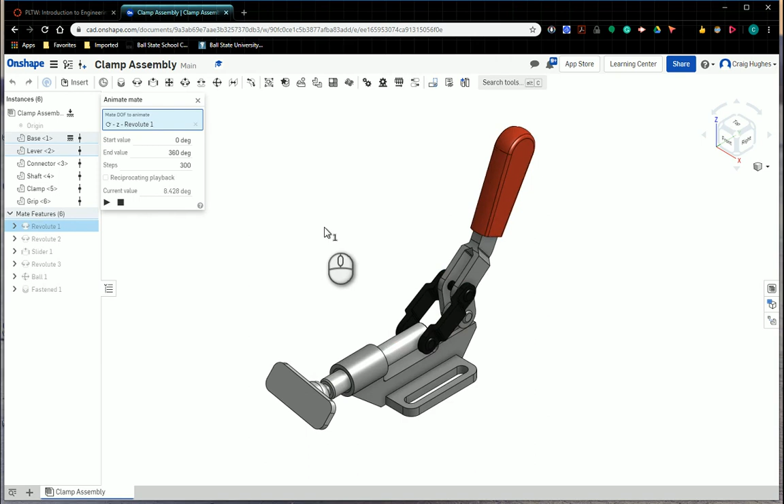If I right click on this and say go to animate, on the very first revolute, and press play, I'm going to get this kind of thing that happens. It's definitely following the motion defined by the mates, but it's not really the correct operation of this particular item.

Let me bring that back. So as we're looking at this, it's not giving us realistic motion. That handle should not be able to go through the body of the base. In order to fix that, Revolute 1 is the one causing that to happen. All the other ones are fine.

I'm going to right click on Revolute 1 and say edit. If I click the play button, that's exactly the motion that's happening. When we go to animate, it just moves that, and all the other parts move with it. So here's what we're going to have to do: we really only want it to move between the position it's in, come down, and then back up.

I'm going to check limits. Right now there's a Z limit. You may have to play around with flip primary axis or reorient secondary axis. The secondary axis and the primary axis actually flip the lever around, so we probably don't want to play with that too much, since it'll mess things up.

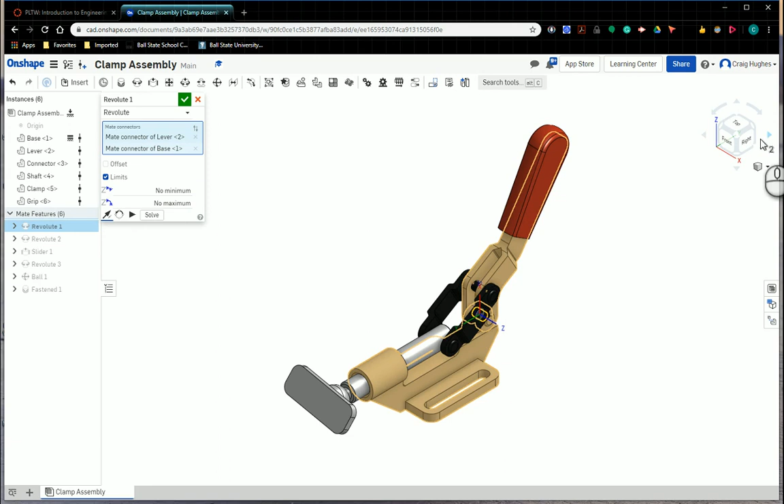I'm going to mess with this a little bit. One way to do that, I'll click over on the right side view, and you'll see there's an X and a Y. When I click that secondary axis, it's going to flip which direction it's in. Right now this isn't exactly the position I want, so I'll click until I get it.

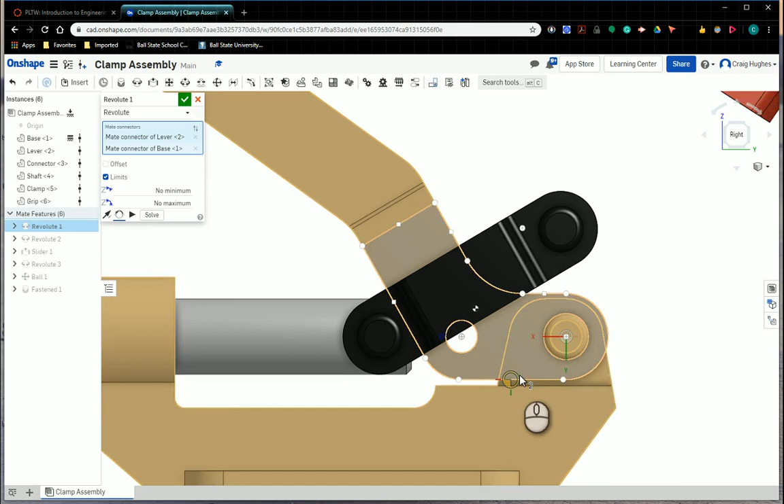This is really what I want to see: starting from this point, the bottom of the lever is going to be parallel with the top of this line, so we're in this position. That's when the clamp is closed, and when you pull it back open, that's what happens. This is actually the perfect kind of position.

You should be able to see the same thing as you walk around there and move that part. Looking at the Z, I'm going to type in 0 for the minimum, and when I click off of it, it'll put in DEG for degrees. Let's go ahead and do 180 for the maximum, and hit the play button.

Okay, now the only issue is that it's actually moving in the opposite direction than I want. So this may be a point where I need to reorient that axis a little bit. I'm going to try to click this. When I reorient, it's going to put X up here and Y there. Now let me hit play.

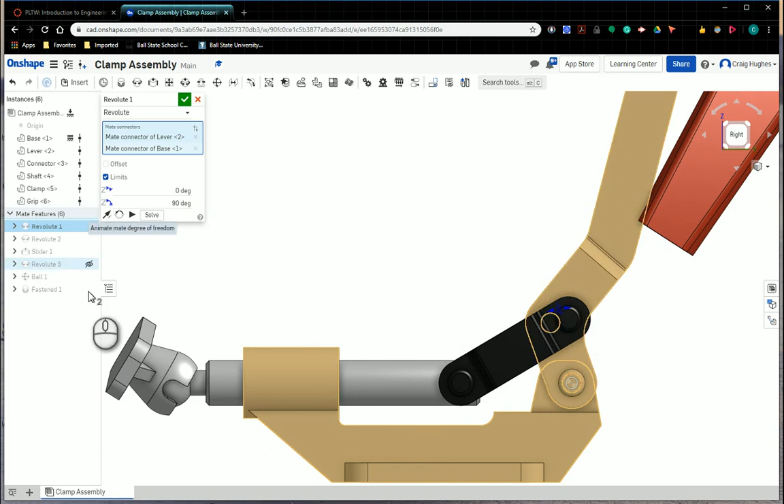Okay, so there's 180 degrees. Now maybe I want it to start in this position, so I'll just edit this to be 90 degrees. I'm just playing around and seeing what kind of motion I can get from this. That's actually the motion I want to see: when the clamp is up, when the handle's in the up position, the clamp is retracted.

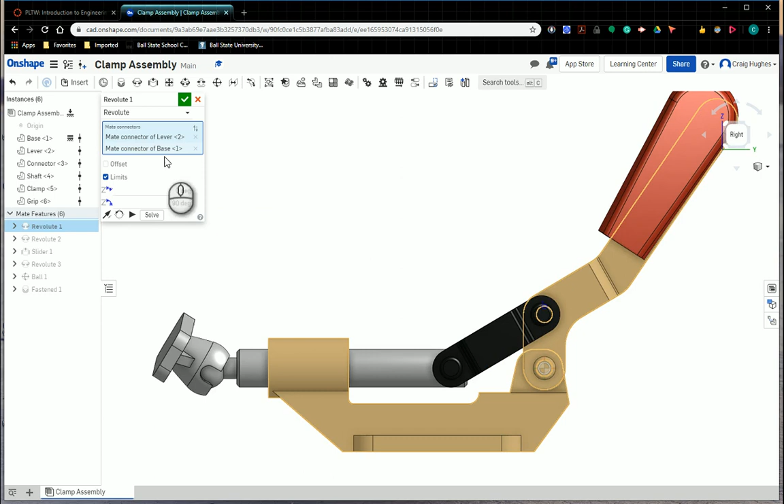When I click play, it stops at 90 degrees, and you can see that blue highlight as the lever's moving. So there's the starting position at 0, it comes down to 90, and then it comes back. That's actually the perfect thing I need: 0 degrees, 90 degrees. I'm going to hit the green check mark.

Now, even though the handle grip didn't go with it when it was doing that, it will now, and everything will be good. You'll still be able to click and drag, and actually, when you click and drag, you won't be able to move it past the limit, because that joint limit is already set, so I can't rotate it around a full 360 degrees.

So I'll go ahead and put it in the up position. If I go back to Revolute 1, right click and say animate, it'll animate all the joints together so you can see that. Now we're seeing a start value and an end value for Revolute 1 at 90 degrees.

If you want reciprocating playback, this will make it go down and come back. It's kind of like the amount of repetitions you'd have in Inventor. This is what you're seeing, but all those joints are moving together in order to get that function to happen for those moving parts.

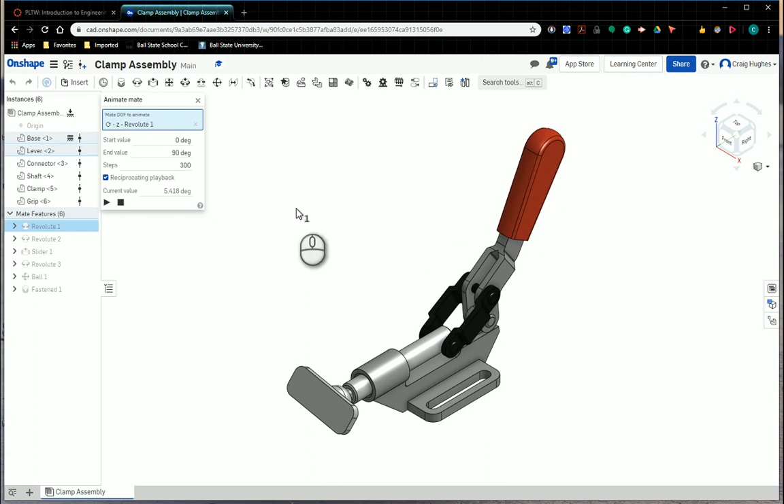If you wish to make this go a little faster, let's drop this down by half, to 150. That makes it go a little faster. The number of steps determines how many steps it goes through to do that, so if you drop that down, let's try it at 50. There it is, a little bit faster as it goes back and forth.

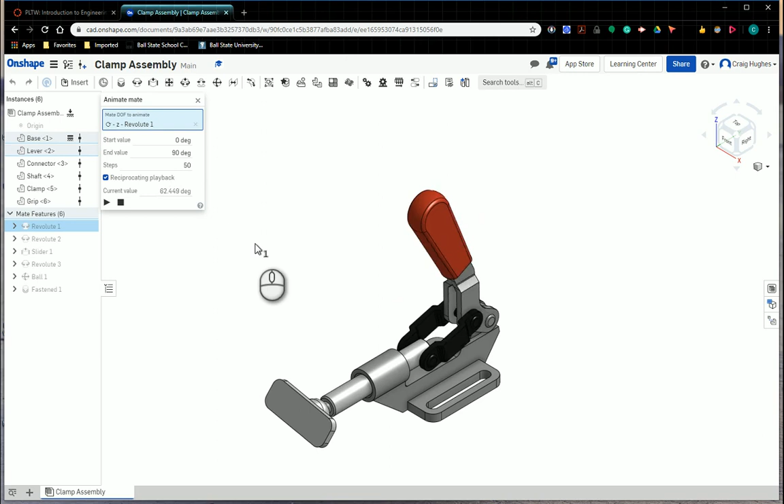So that's just something kind of neat that I wanted you guys to try out, just something to be aware of. I always think being able to do this motion is a really neat option, and I wanted to show you how to do that here in Onshape, very much like we do in Inventor or even Fusion 360.